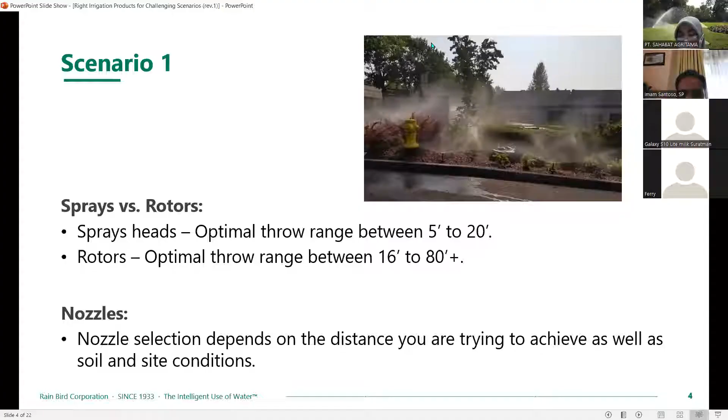Share this screen again. So let's go back to the PowerPoint. But how about the plants? If the plants are planted in pots, are you going to use spray heads, rotors?

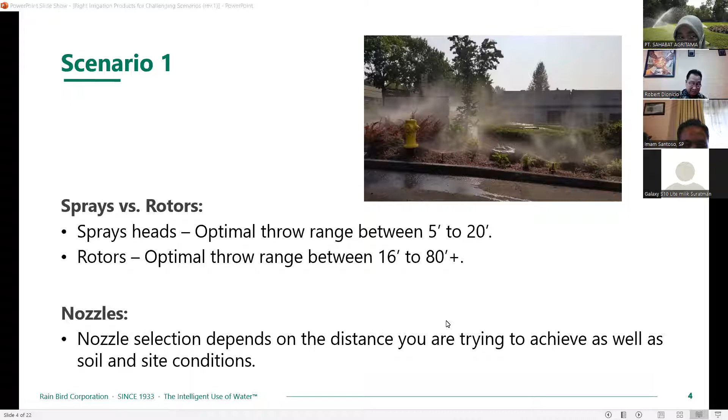How do we irrigate? The challenge here is, how do we irrigate pots on the podium, or podium plants? How do we irrigate the planter box around the swimming pools without clogging or creating annoying runoff?

So here, we can use what we call Rain Bird's emitters, drip emitters. Some drip emitters of Rain Bird are the Xeri-Bug emitters with stake. And we can also use the Xeri-Bug bubblers.

So of course you cannot use spray heads here because of the runoff, and it would follow the hard surface or hardscape if you are going to use the rotors or spray heads. So I will show you some material again, and bubblers.

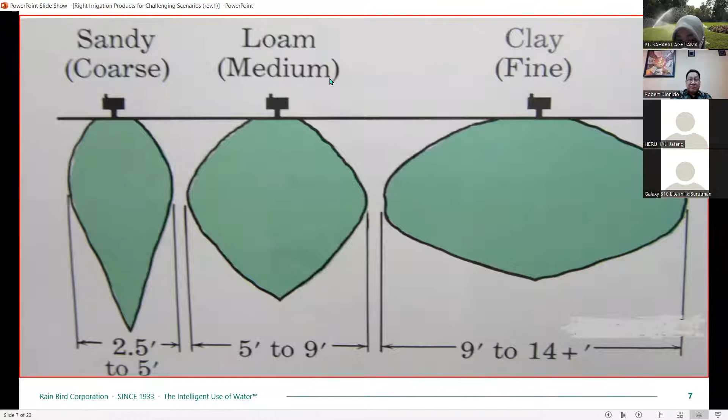Okay, so once you have already considered plant and soil type and pot container size, you can select the Xeri-Bug emitter size. Available in Rain Bird, emitter sizes in terms of capacity are 0.5 GPH, 1 GPH, and also 2 GPH.

And you can buy the stake also if you need. You can buy the 1/4 tubing. You can also buy the blank tubing. This is a set to combine so that you can irrigate pot plantations. So once you know all these considerations, you can now schedule, or calculate the right amount of time to irrigate plants in pots.

Now, before we, do you have some comments, Lisa? Okay. So before we go to poll question number 2, let's review now poll question number 1. To remember, poll question number 1 here is, which of the following products do you find the most challenging to use in your projects?

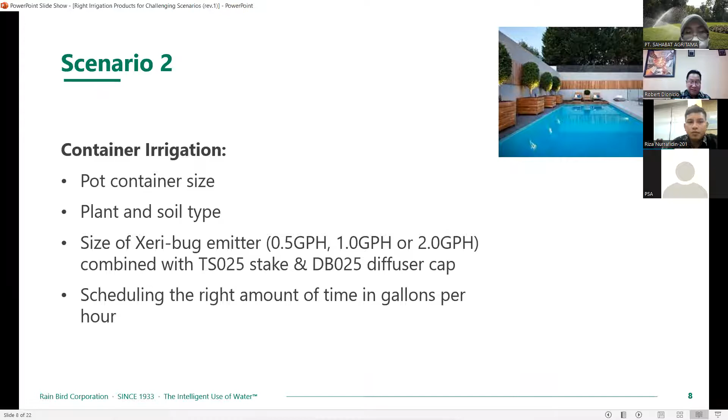Okay, thank you very much for your answers. And let's go now to the next poll question. Poll question number 2. What can be the easiest resource for you to find information on irrigation products? There is a selection again here. Letter A, manufacturer's catalog, the distributor, the manufacturer representatives, friends, and manufacturer's website. So you can choose which is your answer here. You can choose 1, you can choose 2 if you want.

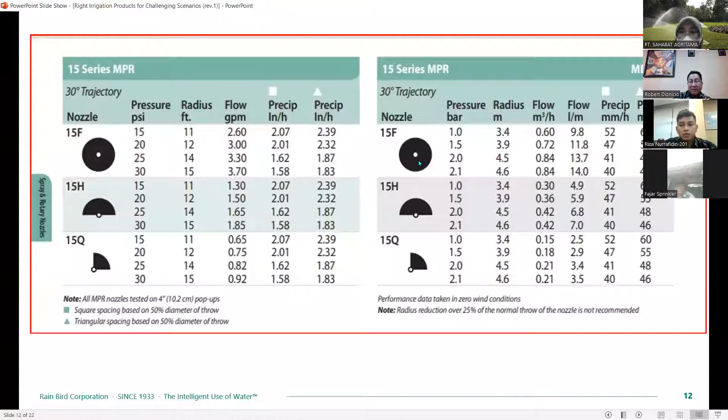As you can see here, for precipitation there are two units here, the English and metric. So let's consider the metric one. If you select the nozzle, 15 full circle spray head, and take 2.1 bar, this is green, and a radius of 4.6, your precipitation rate at the right side of this specification is 40 millimeters per hour if your sprinkler is spaced in square spacing, but if you space it in triangular spacing, the precipitation rate is 46 millimeters per hour. So I would suggest if you are designing, you would use triangular spacing because you will get a higher precipitation rate. That means that you can irrigate your area faster than rectangular spacing.

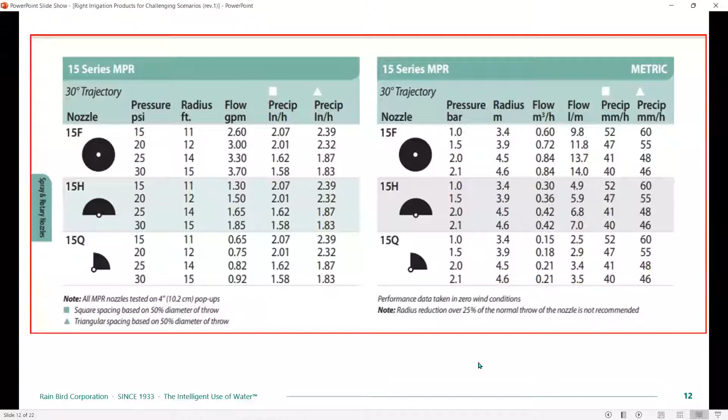So this is what I mean by precipitation rates. You can use this precipitation rate data of these spray heads in the calculation of the time period or operating time of each zone of your irrigation system. Let's see about the precipitation rates of rotors. This is precipitation rates of rotors. Now, how about rotors? You see on the left side also, this is the rotor that I was discussing with you a while ago.

Let's compare the precipitation rates of rotors and spray heads. The 5000 series rotor is a bigger sprinkler than spray heads. So if you look at the precipitation rate of rotors, let's take the biggest nozzle of the rotor 5000 series. Let's take 8 at 2.5 bar. With square spacing, you will get 24 millimeters per hour, while if you space it in triangle, it is 28.

So let's just take the precipitation rate on the triangular method. This is 28 at 2.5 bar. Comparing to spray heads, it is 40 millimeters per hour. So you see, even though the spray head is a small sprinkler and the rotor is a big sprinkler, the precipitation rate of spray heads is higher than this rotor sprinkler. That means you will irrigate your area faster if you use spray heads.

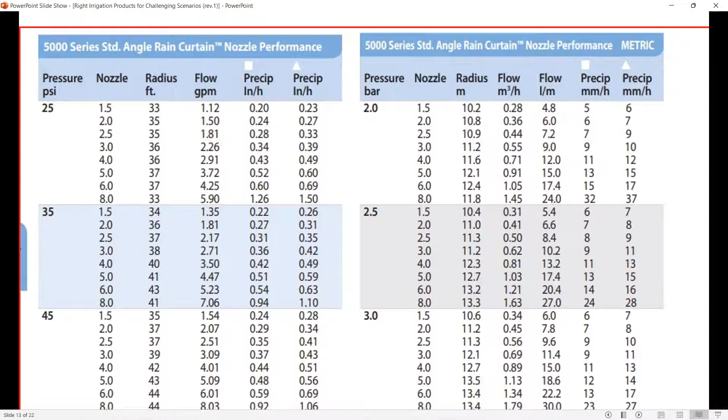But how about if the sprinkler or emission device, like a bubbler or emitters, does not show precipitation rates? There are also some sprinklers that don't show precipitation rates in the brochure. Precipitation rate is very important in calculating time, but it does not show in the catalog. So what will you do? What we do is we have to use a formula.

Let's see, I will show you first the Xeri-Bug emitter specification here. As you see, there's no precipitation rate in the catalog. So where can you find the precipitation rate of this Xeri-Bug emitter? Without precipitation rates, you cannot calculate the operating time of your valves. So you need to use a formula to manually calculate the precipitation rate of each emission device.

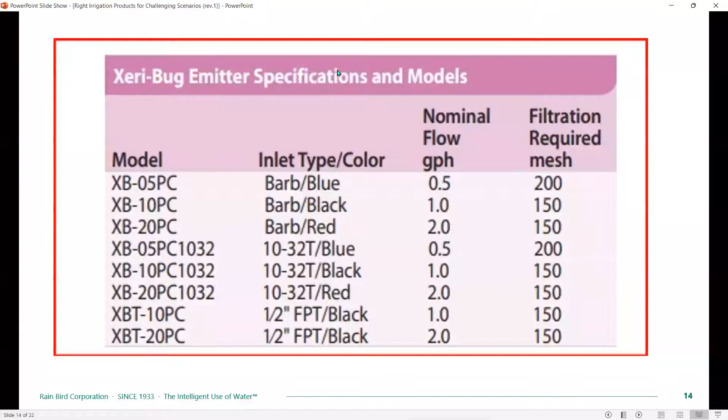As long as the specification shows you the discharge capacity of the emitter or sprinkler, for example emitter XB05, 0.5 gallons per hour, as long as you know the nominal flow discharge, we can use this formula. There are three types of formula. If you space your sprinklers or emitters in square spacing, this is the formula. Triangular spacing, this is the formula. If you have only a single row of sprinklers, no other rows, you can use this formula.

Precipitation rate is very important in calculating your operating time. Operating time, which means runtime, also has a formula. Runtime of each valve is equal to the desired application times 60 divided by the precipitation rate, which is taken from the precipitation rate formula. The desired application is actually the water requirement of a plant. So water requirement and precipitation rate are very important in calculating the time for each zone of your irrigation project.

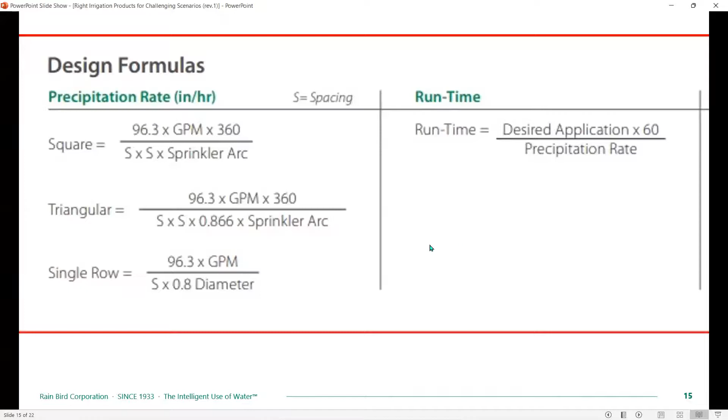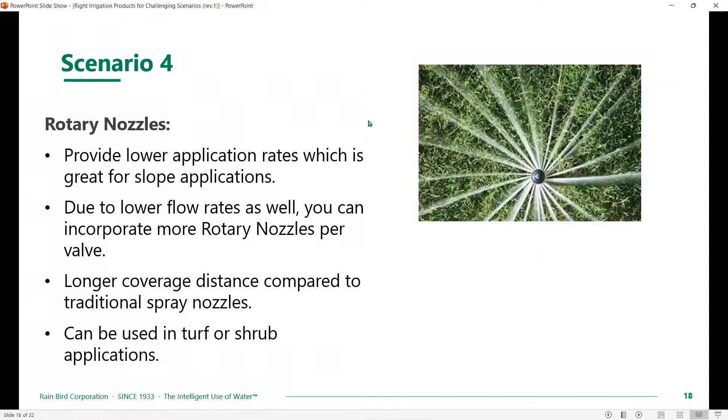Let's go to poll question number 3 now. The question here is, how do you deal with a shortened water window where your current irrigation does not fit? The selection answers here are: Stack stations, which means to arrange your valves according to flow. Letter B, alternative days with multiple programs. C, add a second controller. D, combine stations electronically. You may choose one or two of these answers.

As I wait for your answers, let's discuss scenario 5, regarding water window. The challenge here is: how many of you have struggled to get all your irrigation done in a manageable water window? There are many owners of plantations now who have their own irrigation system, but they don't know how to manage their watering window.

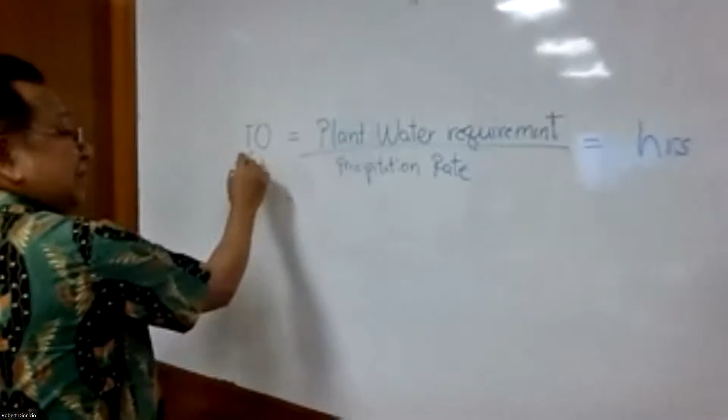So this is the formula for time of operation: plant water requirement, which I already discussed in the PowerPoint. If you want to calculate the time of operation, or running time, divide plant water requirement by the precipitation rate, which equals the number of hours. Let me give you an example.

Oh, because there are a lot of conversions involved, this is a very long process since you have to convert units. So if you have the group chat later on, I will give you the explanation of how to calculate the time of operation there, because if I give you an example now, it will take many conversion steps.